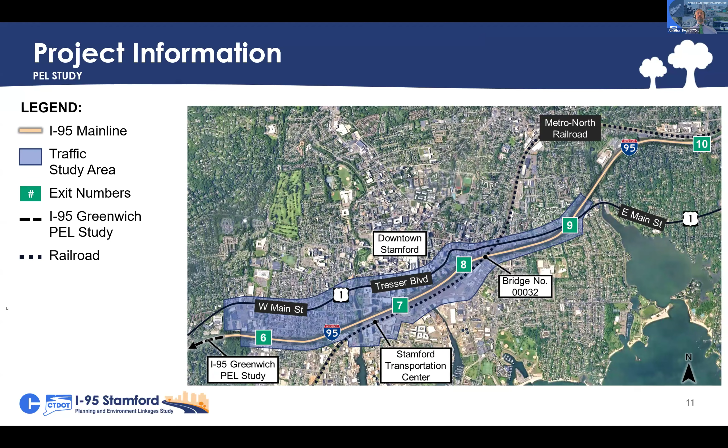And so because there's so much going on in downtown Stamford, busy highway, lots of ramps on and off, as we look at the future of that bridge, we have to understand what is the vision for this whole corridor. So that's why we're undertaking this study. We're also looking at diversion routes like Route 1. So we have West Main Street and Tresser Boulevard, and we've also got adjacent roadways that we'll talk about where the ramps touch down. You can also see the Metro North Railroad on this map, a prominent feature. Next slide, please.

This is an overview of the PEL study process that we've been following. This is, again, our third public meeting so far. Previously in the study, we've established the existing conditions. What are the needs and the deficiencies in terms of how people move through Stamford, traffic operations, safety, multimodal access. From that, we created our draft purpose and need that will guide the alternatives development and selection. And from there, we've developed concept alternatives and started screening.

So today we're going to cover, again, level one screening, which was a low level of detail of what we call that universe of alternatives, followed by level two screening, where we get into a little bit more detail. After we complete level two, we'll move on to a third level of screening, and that will potentially narrow the field down even further.

And the resulting alternatives, there could be multiple alternatives that come out of the PEL and are identified to move forward into the next phase of the project development, which would be the more detailed environmental review under the National Environmental Policy Act. So there will be more public and stakeholder outreach to come, both in this study process and future studies as well.

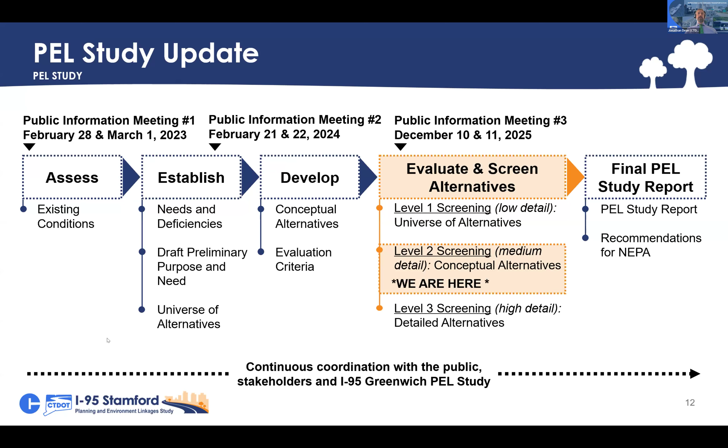Now, how does this study fit into the larger timeline? How do we get to construction? So again, I mentioned that Bridge 32, we've got about 10 or 15 more years of service life. So really the goal is to have that replacement done in the mid-late 2030s. Now, again, this PEL study process that we're following, we're in the very early stages. Really, we have to look at everything. Everything's kind of on the table at this point.

But the advantage of this process is that we combine the early transportation planning with community input, identifying environmental resources. That gives us that range of alternatives that we will take into that next step in the environmental review under NEPA. It'll give us a more complete NEPA process and hopefully an expedited NEPA process as well. When NEPA is done, that's when it will identify one preferred alternative, which would then go into further design. And that's when we start acquiring right of way and getting our permits.

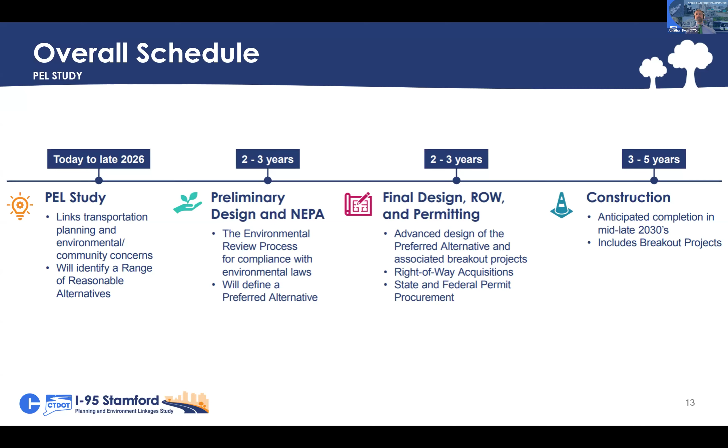I do also want to note that one of the goals of this PEL study and others that we're working on in the state is to identify what we call breakout projects or independent projects that could be done sooner. We've collected a lot of data, done a lot of analyses of transportation conditions, not just on I-95, but again on some of those adjacent roadways. And we want to identify projects that could be done sooner to provide safety and operational benefits. And now I'll hand it over to Ralph.

All right. I hope everybody can hear me. And Stephanie, if you are the host, you have to turn my video back on. There we go. You are back on. Back on. So good morning, everybody.

My name is Ralph Danisco. I'm a senior principal at Stantec and an integrated mobility planner. And I get to lead much of the non-mainline portions of this PEL study. And as Jonathan said, one of the things that the PEL study acknowledges is the adjacent roadways. So we're looking at a larger study area.

It's all of the roads sort of directly adjacent to the main line that are all going to be affected and impacted. They are today by how the main line works, by where those on and off ramps are. And the overall study area recognizes the correlation between the main line and those local roads. And as we do the evaluation criteria for level three, which we'll talk about, we'll see how we do that

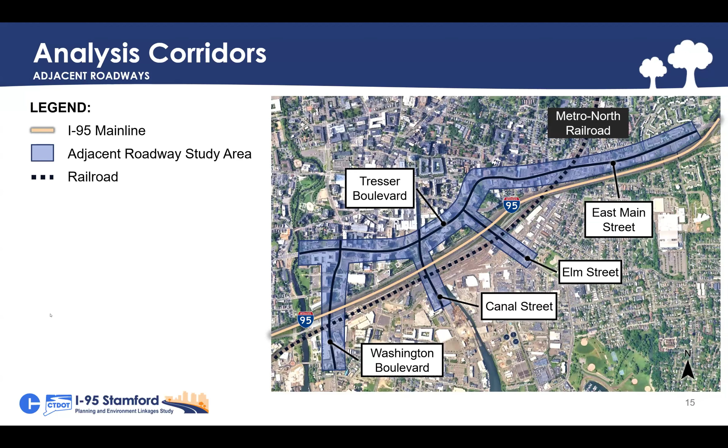much more explicitly. But one of the things that the DOT has asked this process or charged this process with doing is developing several of these adjacent roadways to an advanced concept level of design and align those with the mainline alternatives. And these are the roads that we're taking that extra deep look at right now. So Tresser, East Main, Elm Canal, and Washington Boulevard. We can go to the next slide.

Because for each of those, what we did was we started with the current city plans. City of Stamford is constantly updating and fixing and making changes to each of these roads, signal timing, parking, operations, safety improvements, all of those things. So we built all that in, understood all the private improvements that are happening as well. And then working with the project advisory committee, we developed several approaches for each of these corridors, sort of for what they might look like or how we might want to treat them.

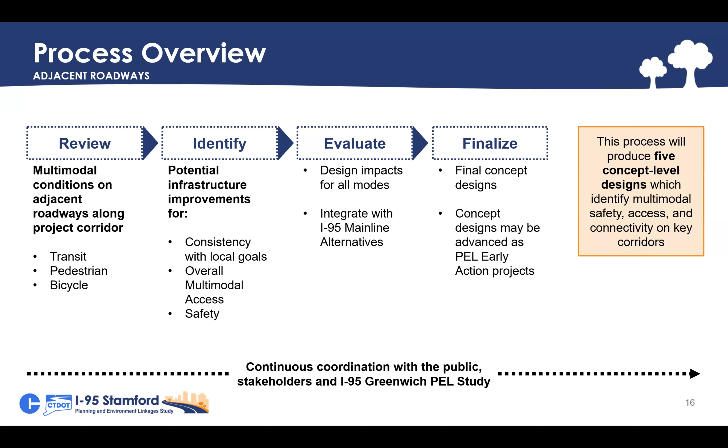And we chose one, and then we've been coordinating those approaches through a concept development process, working with the city, with the sort of full DOT team, so that when we come back at the next PAC meeting and eventually in the public meeting, we can show you some real concept designs for each of those corridors that we can then feed back into the mainline process. And as Jonathan said, I think hopefully some of them could be in a position to be advanced in line with the mainline or even sooner. So that's something we would very much look forward to sharing at a later date. We can go to the next slide.

Additionally, the process has been scoped to include a larger review of what we're calling mobility access. And for there, we're looking at a much larger area than just the adjacent roadways. You can see it on the map on the next slide. And you can see it goes all the way down to the Sound and pretty far north within the city of Stamford. The dashed line shows the kind of mainline area that we talked about a little bit earlier.

And our first step here when we're looking at mobility access is documenting places that are particularly challenged and populations that are particularly challenged. So this could be important locations in Stamford that are hard to get to, or very important schools, hospitals, grocery stores, community centers, parks, things like that. And sort of overlaying that, which is what you're seeing here with places where there are concentrations of populations that are mobility challenged. It could be people without cars, people who are younger, people who are older, people with lower incomes, those sorts of things.

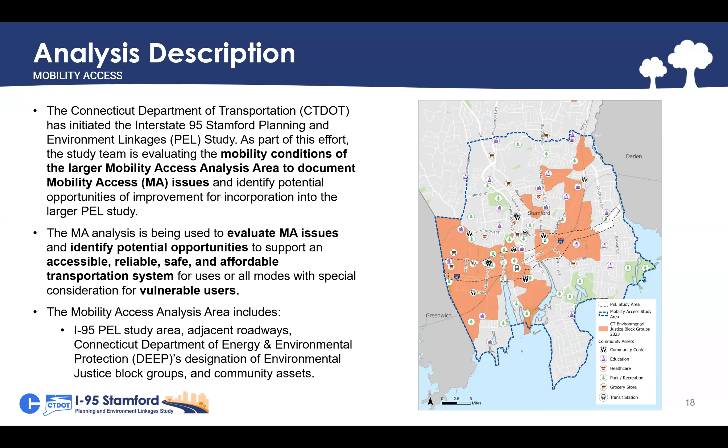And we're doing that and then looking at the larger multimodal network from all perspectives, the pedestrian bicycle networks, transit analysis, safety issues, and then identifying gaps. So where is it where those populations and those destinations and the infrastructure do not match up well, so that we can focus on developing some goals for how we would address those things, and with a particular focus on those challenged areas. We can go to the last slide here.

And where we are in this process is we've developed an overview guide. So we've summarized all that information, all that's going to be available. We're on an ongoing basis holding stakeholder interviews and pop-up events throughout that study area. We've held a survey, we're coordinating that with the city and establishing goals and metrics, which are going to say things like, everybody in Stamford should be within 3 blocks of a high quality bus route, just as an example. It may not be exactly those words. And then identifying where we are meeting those criteria and where we are not.

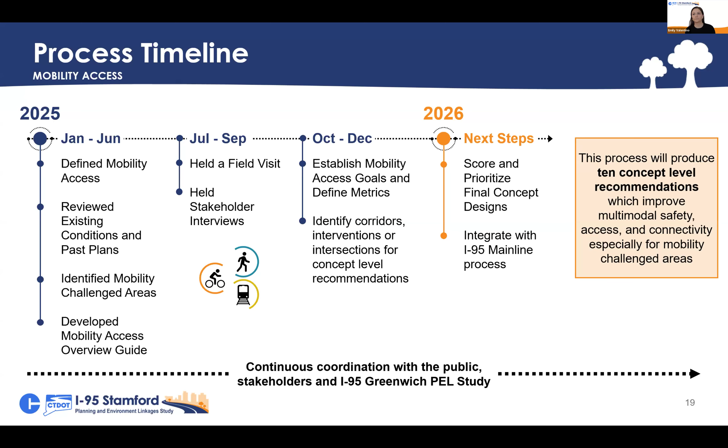And then listing out a whole series of potential improvements that we can prioritize with those goals in mind, and then take 10 of them and develop them to a concept level, that becomes a little bit actionable. We would know this is what we would do, and this is what it would look like, and this is how much it might cost, so that those can be picked up as all of these processes emerge. So that's where we are with both of these processes. Much more detail to come at subsequent meetings, but really today, and at this meeting, we're here to focus on the mainline alternatives.

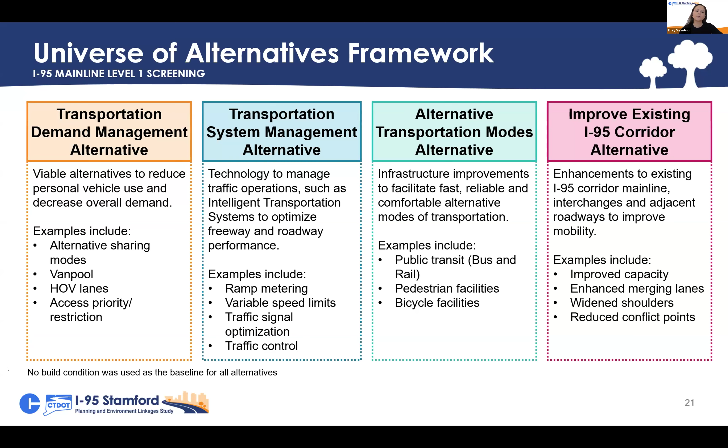So we have 4 types of categories in the universe of alternatives, and this is the level 1 screening. So this is the highest level. How do we evaluate these 4 alternatives? We go back to the purpose and need statement, which really emphasizes the foundation of the project. So what is the purpose of doing the study, and what are the needs of the community and the users of these roadways? So we start with the draft preliminary purpose and need statements, and we have 3 of those.

So mobility and reliability. So we want to increase the mobility for people and goods. We look at geometric and alignment, so bringing any substandard alignments up to standard. And then improve bridge crossings. And I really want to point out Bridge 32 here. It needs to be reconstructed soon, regardless of this study, as John mentioned earlier. So DOT wanted to not just reconstruct the bridge, but also look at the corridor as a whole. So we look at I-95 mainline, and then also what impacts would happen to the Stamford local roadways.

In the second category, we have other desired outcomes, and those can be considered secondary purpose and needs statements, and those are more focused on those adjacent roadways. So we have the mobility on those adjacent roadways, the cross connection of communities, and that's really looking at the north and south connections underneath the highway. Transportation access, so improving the facilities and access to the Stamford Transportation Center. And then construction minimization and avoiding disruption and impacts.

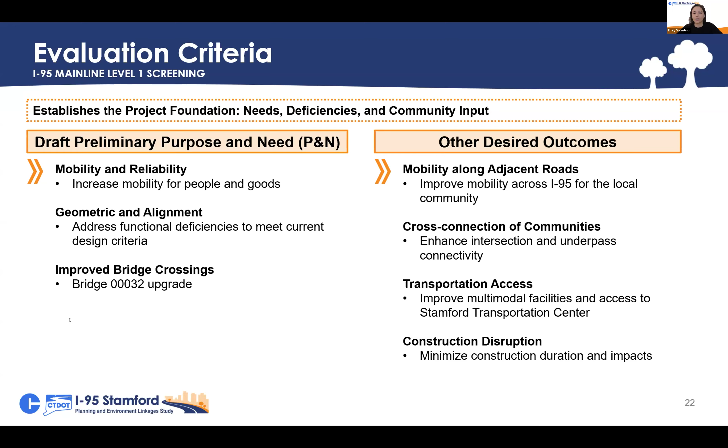So we have the 4 categories of the universe of alternatives. We ranked them against these purpose and needs statements. And we rank them, if we look at the next slide, from most favorable, which is a filled-in circle, to least favorable, which is a hollow circle. And if you see any of the categories with a hollow circle, that means that they do not meet the purpose and need. So on their own, TDM, TSM, and alternative transportation modes do not meet the purpose and need. Improving the existing I-95 corridor is the only category from this level 1 screening that does meet the purpose and need, and we'll move on to the level 2 screening, which I'll describe in a moment.

But I do want to stress that the improve existing corridor alternatives that we come up with will include elements of the TDM, TSM, and alternative transportation modes. However, these on their own do not meet the purpose and need, but they will be incorporated into the future phases of the study.

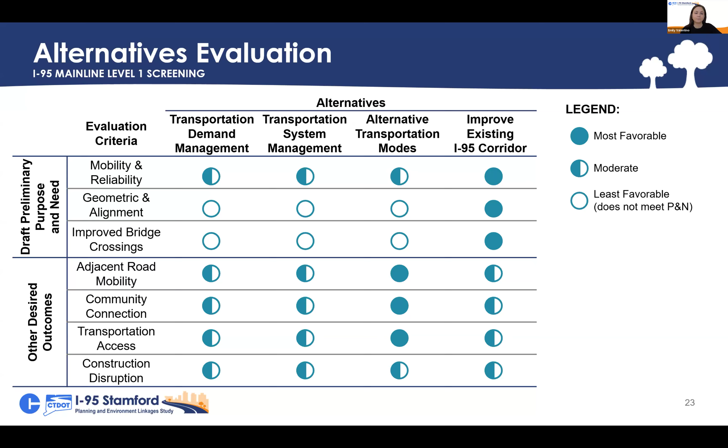We then take it a level deeper and we go to the level 2 screening. And this breaks out again into more subcategories. I want to stress that nothing that you see today is final. We value your feedback and your input. So as we approach the level 3 screening and we move forward along the project, we will be tweaking these alternatives and making them better based on your feedback, based on the traffic analysis and other factors as well.

So these subcategories of the level 2 screening, we broke them out into 3 categories. First one being added capacity alternative, AC. Second, geometric and operational alternatives, those are GO. Collector distributor alternatives is the third category, CD roadways. So we have 3 subcategories, and then there are various elements that we included within these 3 categories, being replace bridge 32, which all of the alternatives do that, modify interchanges, improve some ramps, and realign the main line.

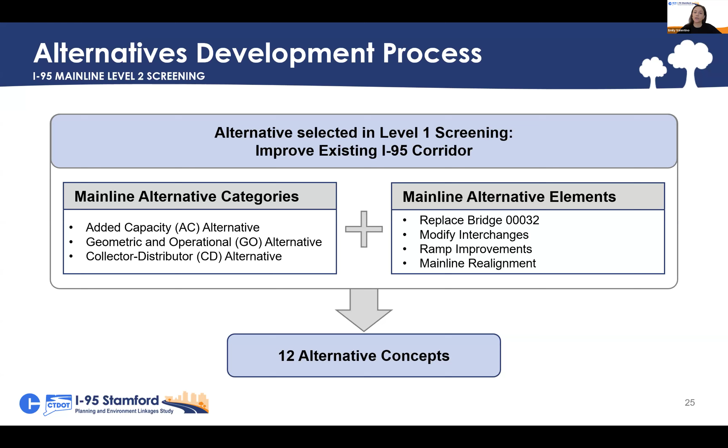So we mixed and matched all of these elements within the categories, and we analyzed 12 concepts within the level 2 screening. I'll start by kind of describing a little bit about those higher level categories, starting with the added capacity alternative. So what that would mean is adding capacity to the main line. So instead of 3 lanes in each direction today, there would be a 4th lane in each direction in the northbound and southbound main line.

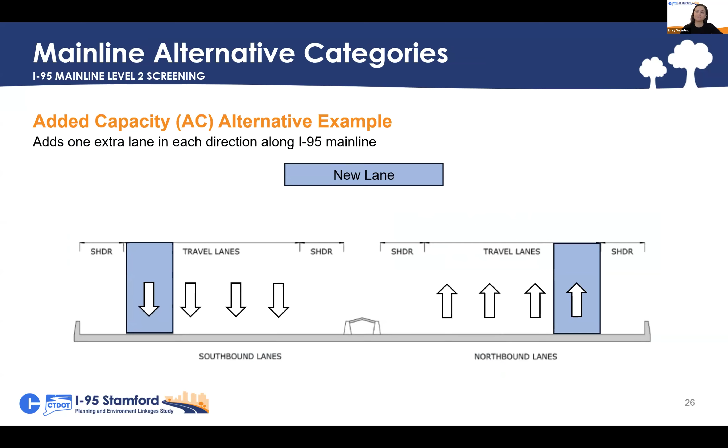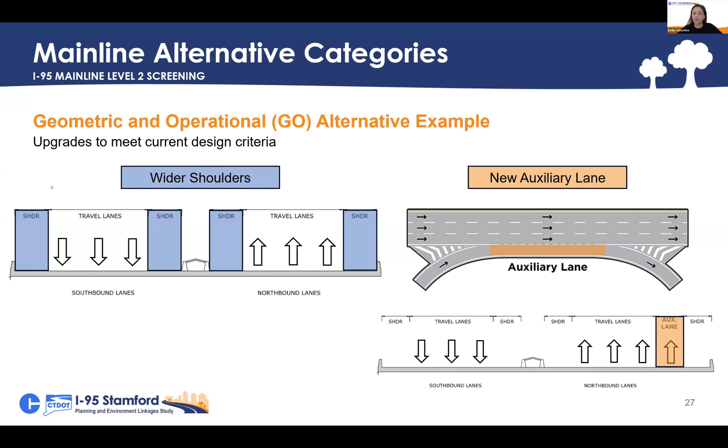The geometric and operational category, an example would be widening shoulders, like I mentioned before. So there's a breakdown lane, so you're not impeding traffic if you need to pull over. Also, adding an auxiliary lane. Think about the project that's currently ongoing and recently completed between 7 and 6. So adding that aux lane so that there's more space to merge onto the highway and also slow down to get off of the highway.

And the last category would be collector distributor alternatives. So this would be a roadway that is parallel to I-95. It would not disrupt the main line. The roadway would collect vehicles, so all the exiting vehicles would exit onto the CD roadway. The speed would be slower. And this is where all the merging and the diverging happens.

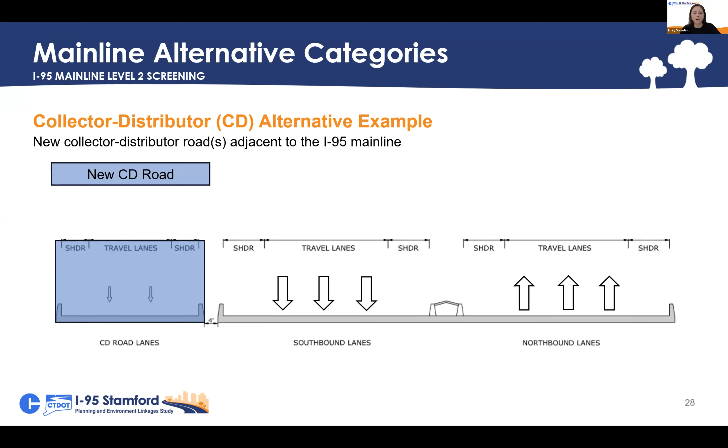So if you're getting off the highway or onto the highway, you first enter or exit the CD roadway, merge with vehicles, and then everybody together comes back onto the main line. So there are less merge and diverge points on the main line, which would lead to safer operations and smoother traffic flow. I'll now hand it over to Chris to talk about some of the more detailed elements within these categories.

Thank you, Emily. My name is Chris Benitez with Stantec. I'm the highway design lead. So as Emily was mentioning, there's 3 main categories of alternatives. And within those 3 main categories, there's a mix of these alternative elements that are listed on the left side of the screen, those 9 elements. We're going to go through each one of those in greater detail in the next few slides.

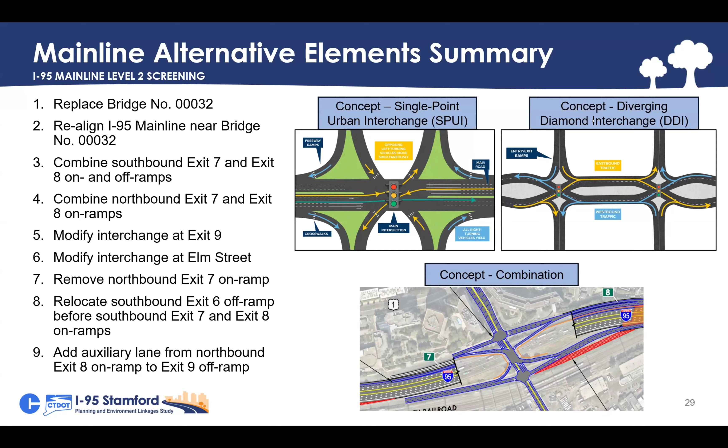But ultimately, the main takeaway here is the 12 alternatives that have been developed are based on a combination of those 3 main categories and all these alternative elements that are mixed together in order for us to identify which are the best performing alternatives. So let's move on to this next slide.

Bridge 32. So this bridge is along I-95, crossing over the Metro North Railroad, Myrtle Avenue, and State Street. This bridge is at the end of its useful service life, and its current configuration does not allow for accommodating today's design standards. So the replacement of Bridge 32 is included in all the alternatives.

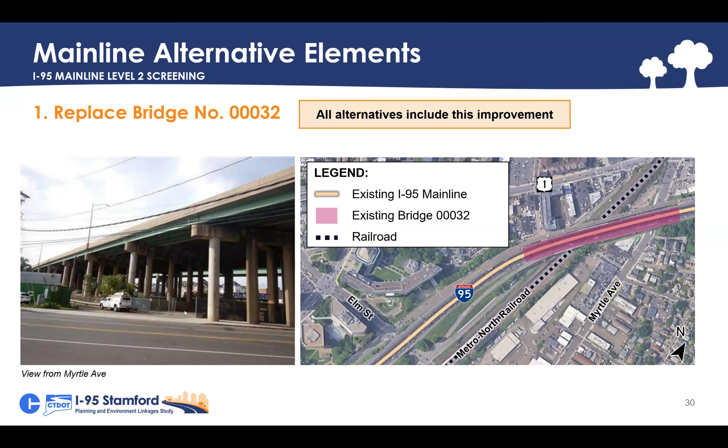All right, let's move on to another alternative element, which is the realignment of the I-95 main line. I'll first start out talking a little bit more about Bridge 32. So this bridge, reconstructing the bridge presents several challenges from a constructability and traffic maintenance perspective. So the idea with realigning the I-95 main line is to construct the bridge adjacent or near the existing bridge so that the traffic could be maintained on the I-95 facility. So this option allows for minimized constructability impacts as well as impacts to the traveling public.

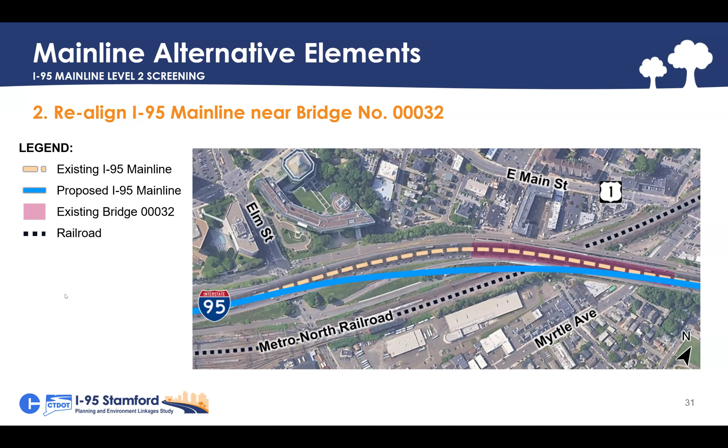All right, now we're going to move over to the southbound side of I-95, exit 7 and 8. Currently at these exits, you have two on-ramps closely spaced together, short acceleration lane. This improvement would combine those ramps so that you would enter the ramps from the same location, but the exit 7 and exit 8 vehicles would merge together into a ramp before merging into the I-95 facility. So this minimizes the conflict points on the expressway, and it also allows for lengthening of that acceleration lane to smooth operations into the expressway.

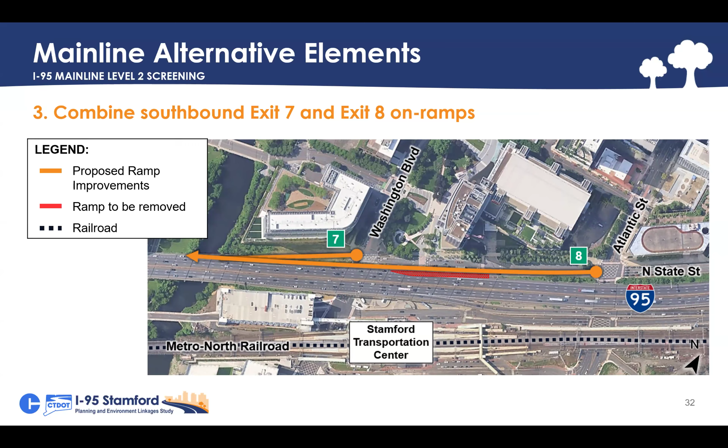All right, now we're going to take it over to the northbound side. Here we have exit 7 and exit 8 on-ramps. Similarly to a lot of these other on-ramps, these are successive on-ramps. So there's a lot of turbulence on the expressway at these points. This improvement would combine the ramps, similar to the southbound side, so that drivers from exit 7 and exit 8 on-ramps would merge into a ramp prior to merging into the expressway. Another improvement that reduces the conflict points on the expressway and reduces the disruptions on the expressway.

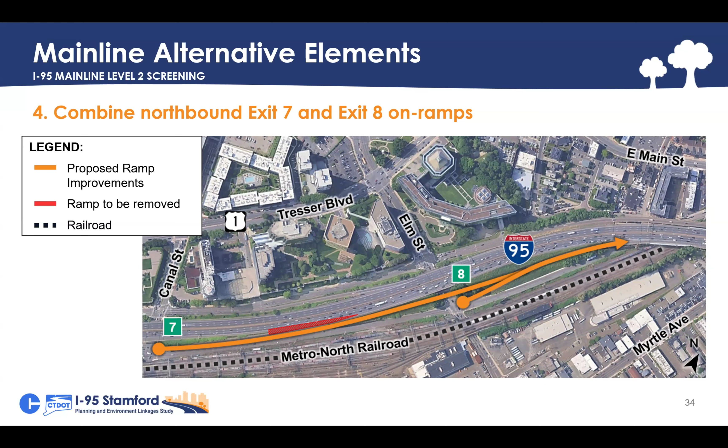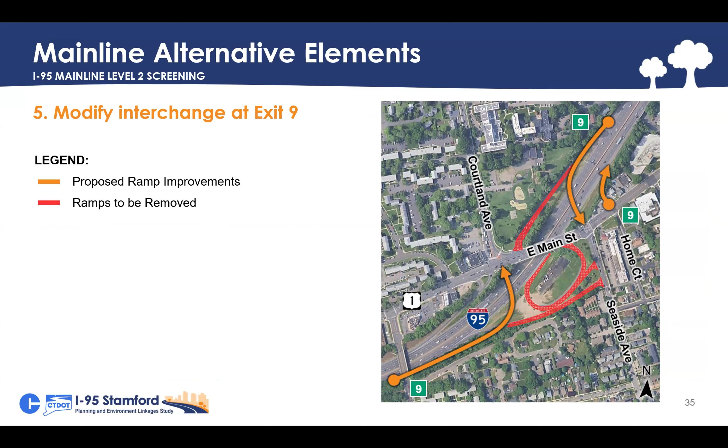So let's move over to, we have the interchange at exit 9. This is East Main. We know that there's a lot of congestion at this interchange. So this is one of the locations we're prioritizing improvements for as part of the study. One of the improvements we're evaluating are new flyover ramps. So these improvement options, we're going to continue refining and evaluating in the more detailed level 3 analysis.

So let's move over to the next interchange. Another interchange, we know there's a lot of congestion. This is at Elm Street. This provides access to the exit 8 ramps. So the current interchange is what we call a tight diamond configuration.

So some of the ideas we're exploring, we've been evaluating. One of them is a modified single point urban interchange. We've also taken a look at a diverging diamond interchange, as well as enhancing the existing diamond interchange configuration. So these are things that we've been evaluating, and we're going to take it to a greater level of detail in the level 3 analysis, and it's going to be harmonized with those adjacent roadway improvements.

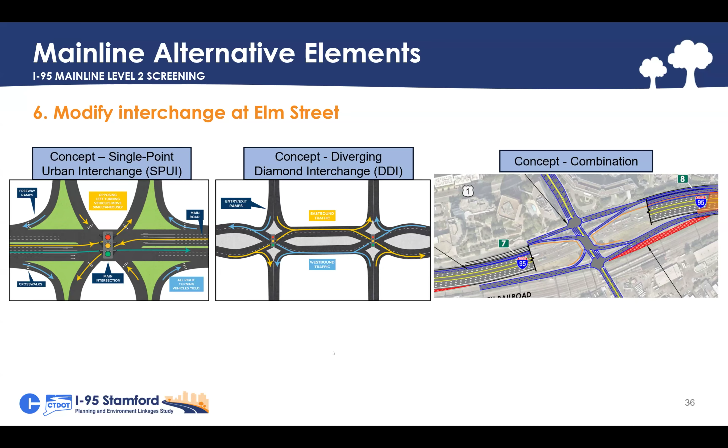Okay, so let's take it over to this next improvement here, removing the northbound exit 7 on-ramp. So this improvement comes into play when we're looking at the Elm Street alternative configurations, such as what I mentioned before, that modified single point urban interchange. It would be required in order to accommodate that type of interchange design. So it would also need to be required for some of the mainline alternatives.

We know that the exit 7 ramp, removing it would reduce the conflict points at this location. But we also understand that it would increase the traffic at exit 8. So that's something we're going to take a closer look in the next stage of the analysis.

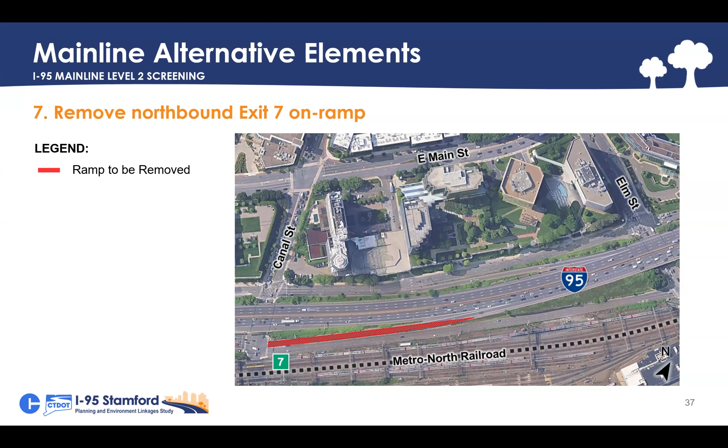So let's move over to the next improvement here. So the relocation of the southbound exit 6 off ramp. Let me just start with exit 7 and exit 8. There's a lot of congestion right there at exit 7 and exit 8 on ramps. You have what I was mentioning before, closely spaced ramps, a lot of traffic entering from both of those exits, and in addition to the I-95 mainline traffic.

So this improvement would relocate the exit 6 off ramp before exit 7 and exit 8. And the benefit of that is that would reduce the traffic that is on that stretch of expressway at exit 7 and 8 and improve the operations. So how would this be accomplished? The exit 6 off ramp, conceptualized, it would be accessed right around Elm Street, and then it would be elevated over exit 7 and exit 8 on ramps so that exit 7 and exit 8 are maintained. And then the exit 6 off ramp, that elevated section would tie back down to the I-95 main line and exit off.

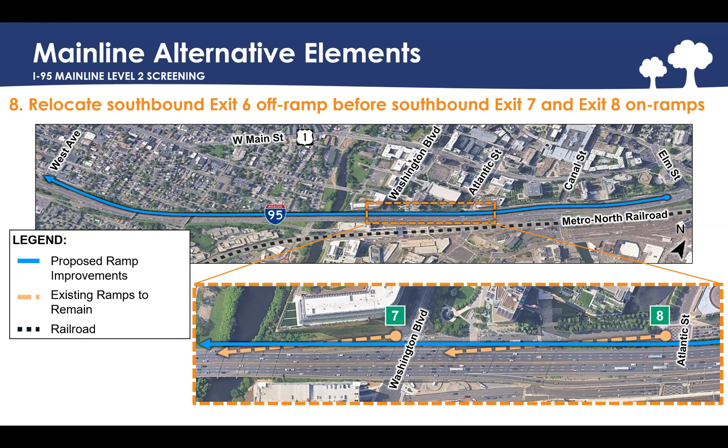So let's move over to the auxiliary lane. Emily was just talking about this one. This improvement would add an auxiliary lane between exit 8 on-ramp and exit 9 off-ramp. So similar to the exit 6 to exit 7 auxiliary lane improvements that are there today. I believe they're finalized, they're completed.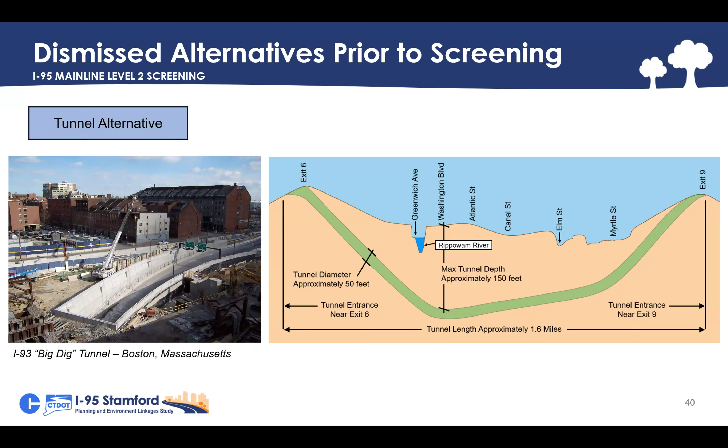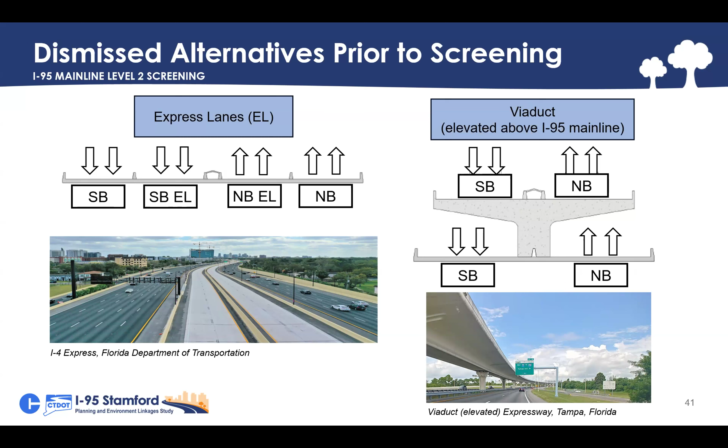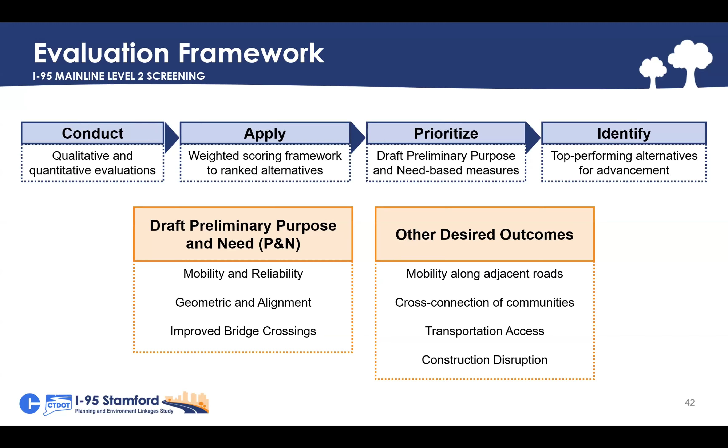Okay, let's talk a little bit on the next slide here with the framework. So we established a framework prior to evaluating all the alternatives, and we're going to get to some of the criteria in the next slide. But just so you know, the evaluation framework we took was establishing qualitative and quantitative evaluation measures. We came up with a scoring system, prioritized some of those purpose and need measures that Emily was mentioning, and we're gonna walk through them right now in the next slide, and then we identified those top performing alternatives. I think the key takeaway here is that this process was developed so that there is a fair and consistent approach to evaluating all of the alternatives.

So let's move over to the evaluation criteria. So this is building on that level one screening. Level one screening, purpose and need, other desired outcomes. So we have transportation-based measures, we have constructability, environment, and community. So these are the measures in this level two analysis that were used to evaluate all of the alternatives. In level three, there's going to be a more detailed evaluation criteria.

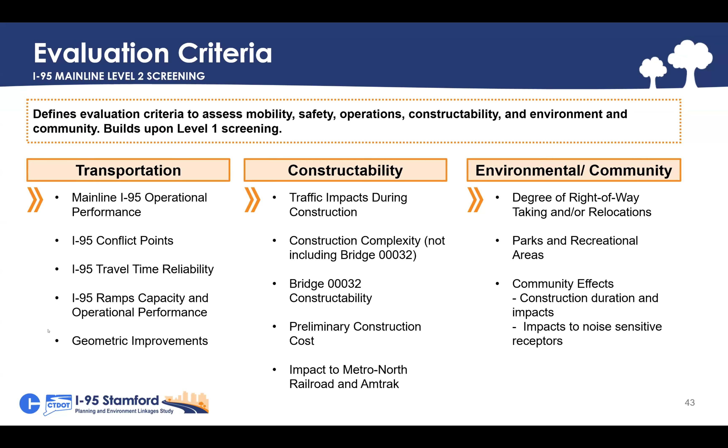So we have identified 4 alternatives, which we're going to walk you through in a little bit, just to go over some of the improvements. But ultimately, each of those main categories of alternatives, there's at least one alternative that is advancing to the next stage. So we're still going to be looking at, in level 3, an added capacity, a geometric and operational, and a collector and distributor option. So having said that, we're going to now walk through some of these alternatives.

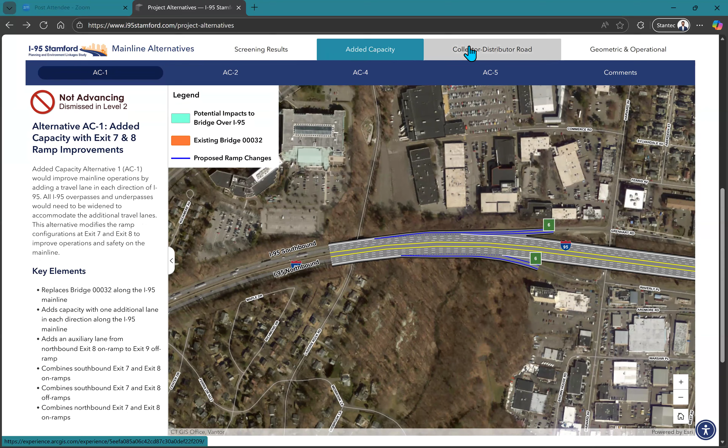Okay, so we have provided a link to the website. This is up and running. You all are free to access this and check out the alternatives at your own leisure. So I'll walk through some of these alternatives, but ultimately, if you go to the project website, Project Alternatives tab up here, and then if you scroll down, you have all of these alternatives for the main line. So just real quick, to get your bearings straight, when you scroll down, top row, you'll see screening results, added capacity, collector distributor, geometric and operational. When you click on each of these, all the alternatives that we were just talking about, they show up.

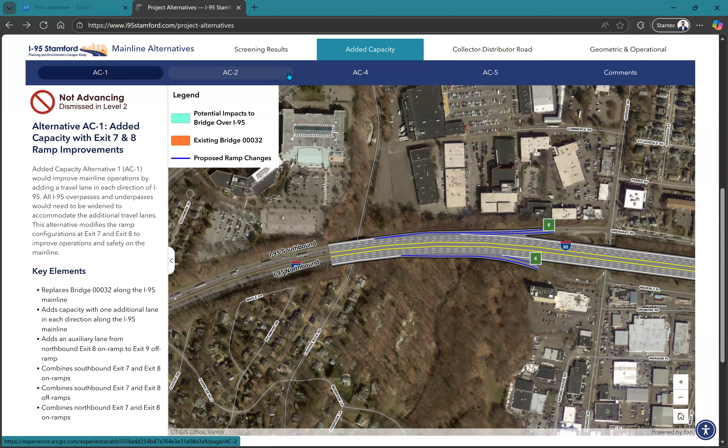So what you will notice is the alternatives that are not advancing, you'll see it, let's say, AC1, not advancing, and then the alternatives that are advancing will not have that. So those are the ones that you want to check out if you want to check out the advancing alternatives. So let's talk a little about AC4. So this alternative is the one that would be adding an additional lane in each direction of the main line.

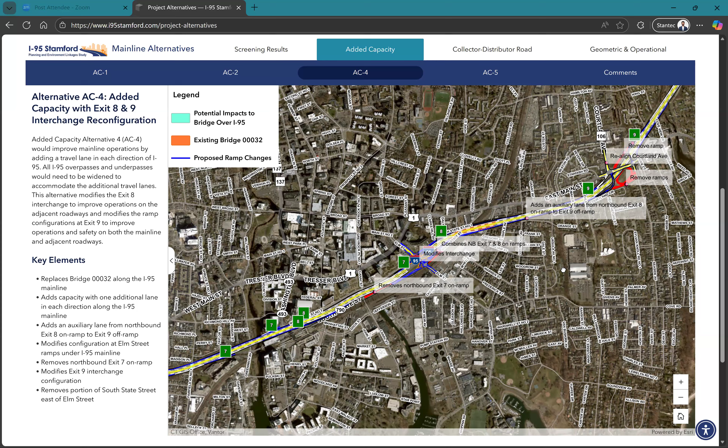So it would include 4 lanes in each direction. Now let me highlight some of the main improvements from this one. I'm going to zoom in, and you can zoom in if you're a little unfamiliar with this. If you just click on the map, you can drag the map anywhere, and you can zoom using the zoom features here. You can also, I believe, scroll as well. Yes, I'm scrolling, so okay.

So I'm going to zoom in a little bit more so y'all can see. So AC4. This is one of the improvements that we're looking at for AC4, modifying this interchange. What you're seeing here is that modified single point urban interchange. Keep in mind, Emily mentioned it, these are not final. We're still going to be making lots of refinements, and we're going to be evaluating these in greater detail in the next stage. So this is the modified interchange.

This improvement would also include, actually, let me zoom back in. Maybe stay here at this zoom level. This is the removal of exit 7 on-ramp. And the reason why is primarily because of that modified single point urban interchange, which cannot be accommodated at this point.

Okay, let's travel up a little bit more. This also includes removal of State Street. And that is because right now, based off of this modified interchange design, the ramp may not reach the vertical clearance requirements to allow for State Street to operate. So something we're going to take a closer look at in the next stage.

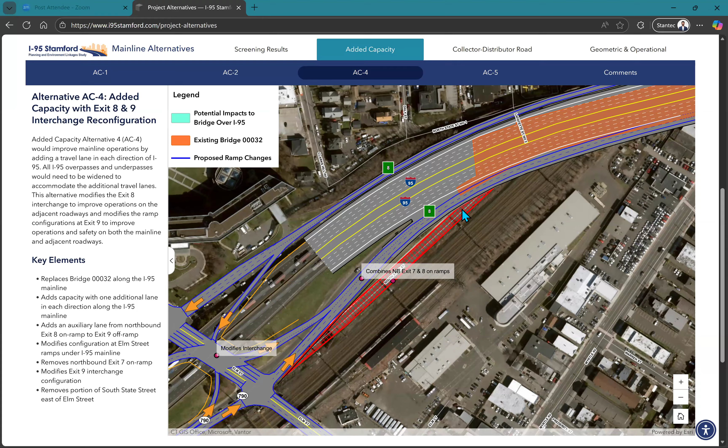But let's move over to the final improvement here. Before we get to the interchange at East Main Street at exit 9, this improvement also includes that auxiliary lane between northbound exit 8 on-ramp and exit 9 off-ramp. And notice that there's labels for these improvements, so it makes it easier to find where these improvements are. And one thing I almost forgot to mention is we do have a description of all the alternatives on the left side of the screen, including the key elements.

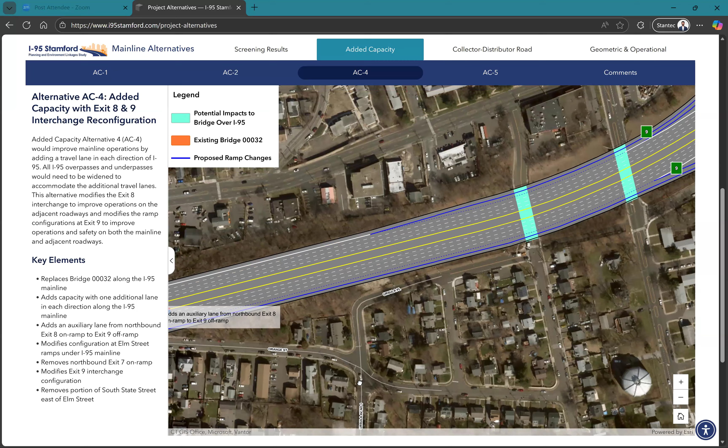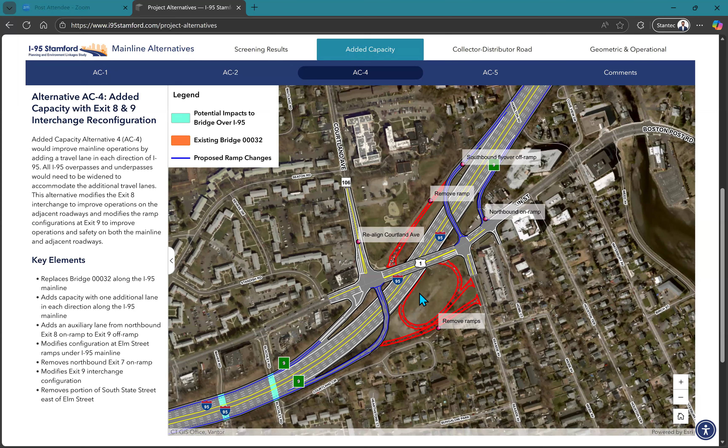All right, let's get over to exit 9. I'm going to zoom out a little bit. I think this is too close. Okay, so exit 9, East Main. So this is the one we're looking at, flyover ramps. We're looking at a few other options. So this is a priority interchange to evaluate.

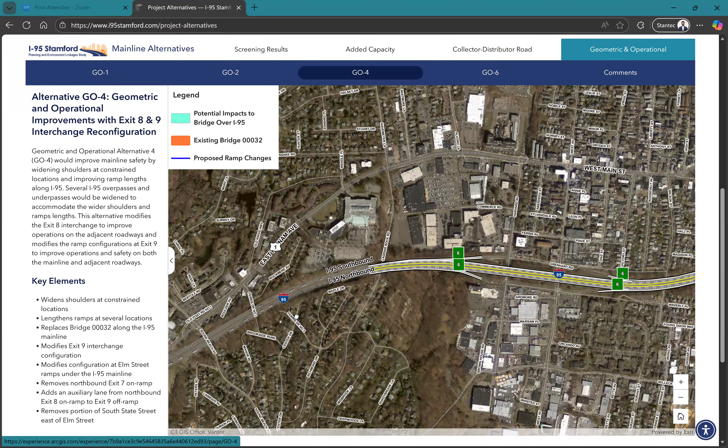All right, let's go geometric and operational. GO-4, that's another one of those advanced alternatives. So I'm going to take it high level, and then I'm going to zoom into some of the other improvements. So we're starting with the interchange at Elm Street. Same thing as AC4. We're looking into modifying this interchange as part of this improvement. This would also include removing that northbound exit 7 on-ramp. All right, and then I'm going to scroll here. Removing the South State Street due to the vertical clearance.

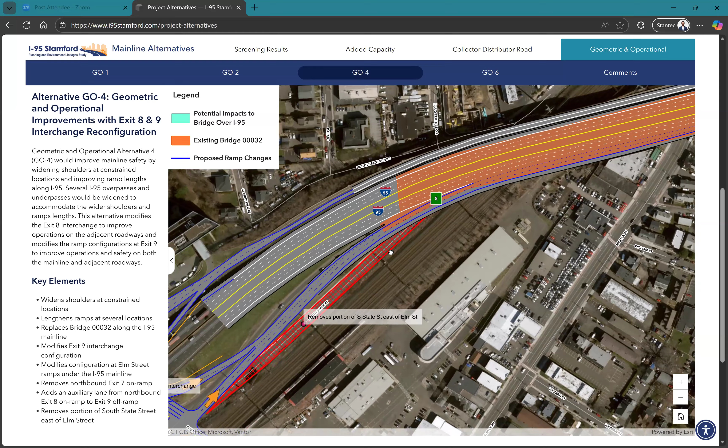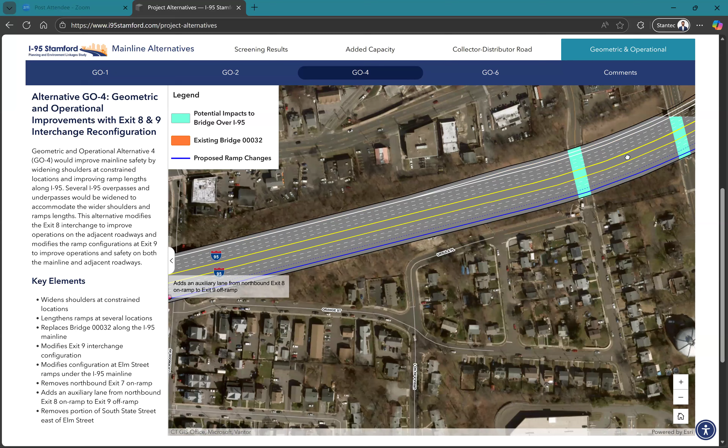And then this would also include that auxiliary lane, which I'm going to scroll here. Here's the little sign for the auxiliary lane between northbound exit 8 on-ramp and exit 9 off-ramp. And then the final improvement here is the exit 9 interchange, which includes East Main. So very similar to AC4 in terms of the interchanges and some of the improvements. Main difference is AC adds that additional lane in each direction.

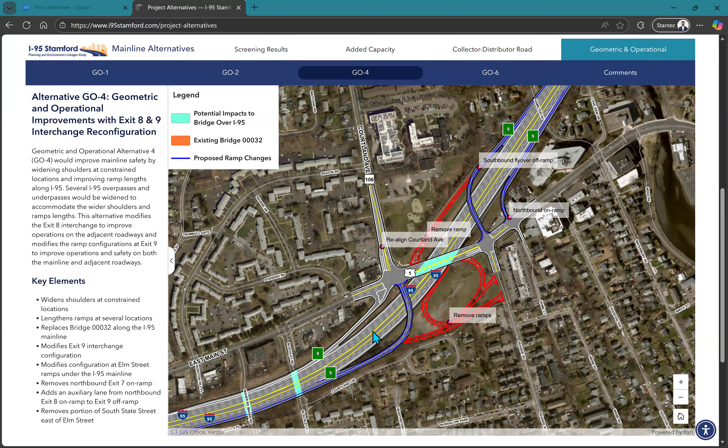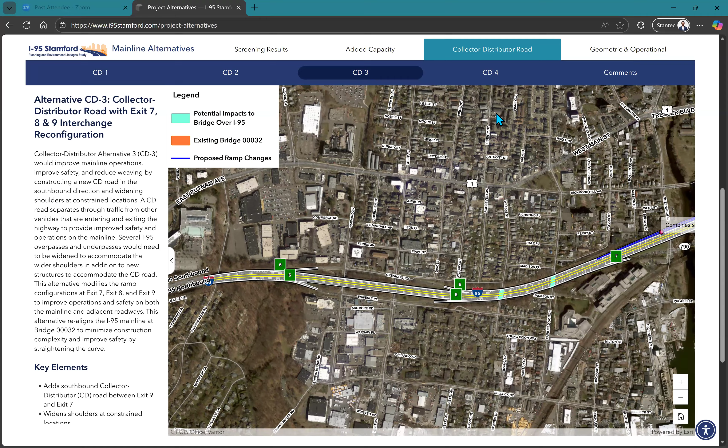All right, let's hop over to the collector distributor roads. I'll start with CD3. So collector distributor roads, 2 of them are moving forward. They're 2 very distinct alternatives. Keep that in mind. So CD3, the big difference between the 2 CD road alternatives: CD3 includes only a southbound CD road, collector distributor road, and CD4 includes both a southbound and a northbound CD road. So let's get into some of these improvements now of CD3. I'll show you the CD roads in just a little bit. Let me just go through the west side here.

So this alternative includes a combination of the southbound exit 7 and 8 on-ramps, which is what I was describing, how these exit 8 and exit 7, they combine. The drivers would combine into this ramp before entering the expressway. Okay, let's scroll over here. Try not to go too fast. We don't want to get dizzy. Okay. All right.

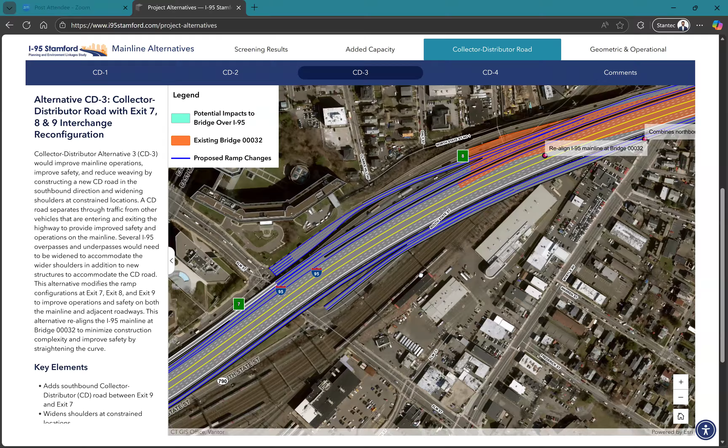So this alternative also includes a combination of the exit 7 and exit 8 on-ramps. Similar to the southbound side, this would have drivers merge into this ramp before merging onto I-95, and then that would continue as an auxiliary lane all the way over to exit 9. Another key feature here, I know I'm going back and forth, I'm going to try not to, I'm going to slow down here. But another key feature here that we're looking at, realignment of the I-95 facility. This improvement is to minimize those constructability challenges that I was mentioning earlier.

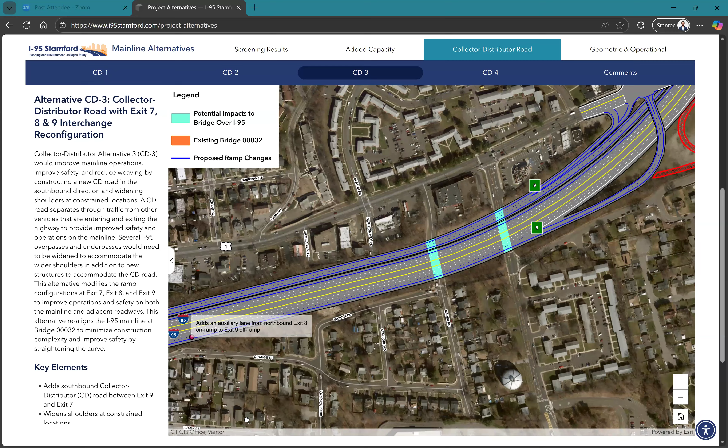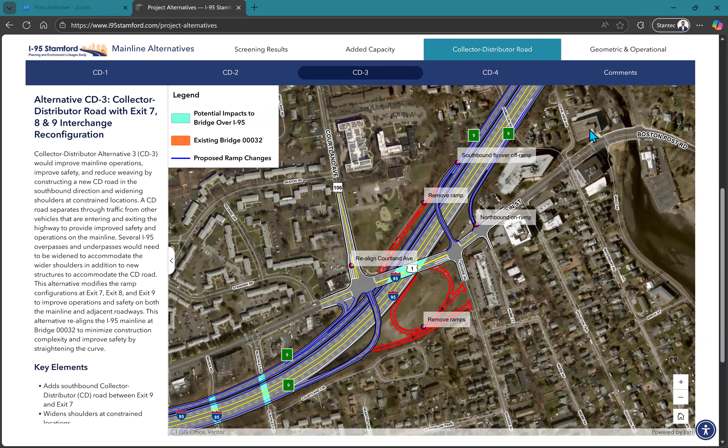So, okay, before we get to the CD road, let's head over to exit 9, interchange, same thing. You're going to see this concept. It's the same concept in all of the alternatives. This is something we're going to refine, but ultimately we're looking at flyover ramps and refinements to those ramps and evaluating in greater detail in the next level.

Okay, so what is a CD road? Let's take it over to the starting point of the CD road. This is the southbound CD road. So this CD road would start right at the southbound, right around the service plaza area.

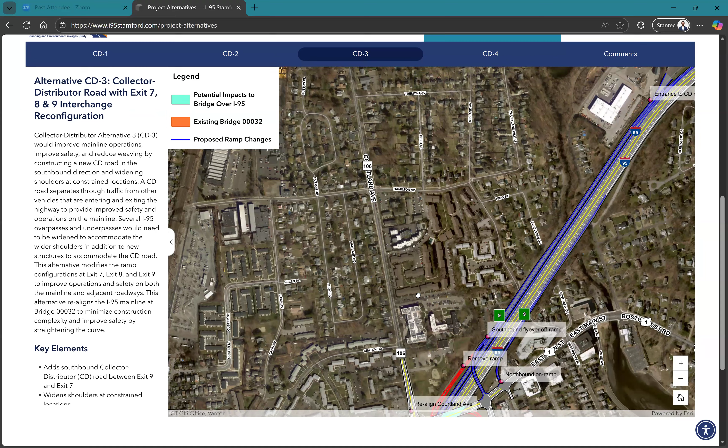And so the CD road would essentially start near the service plaza area, and it would allow for the on and off ramp movements to be collected, the local traffic along this CD road. Improves operations on I-95. This would continue on up until exit 8.

So you see this blue line here, that is the CD road. And the CD road would continue on, allowing folks to get off on exit 7, get off on exit 8, or continue on and get on the I-95 main line at around this location between Elm Street and Canal Street.

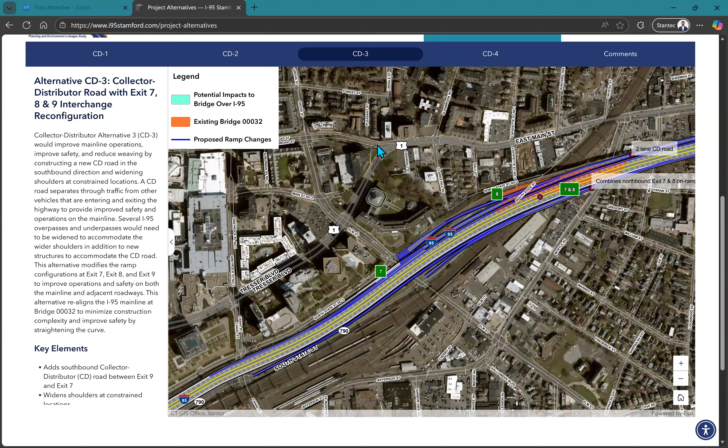Okay, now let's go over to CD4. This is the last one, so bear with me. We're almost there. So CD4, this alternative includes both the northbound and the southbound CD road. So some of the improvements that we're looking at as part of this, I'm going to zoom in to this improvement here, removing northbound exit 7 on-ramp, and that is to accommodate the northbound CD road.

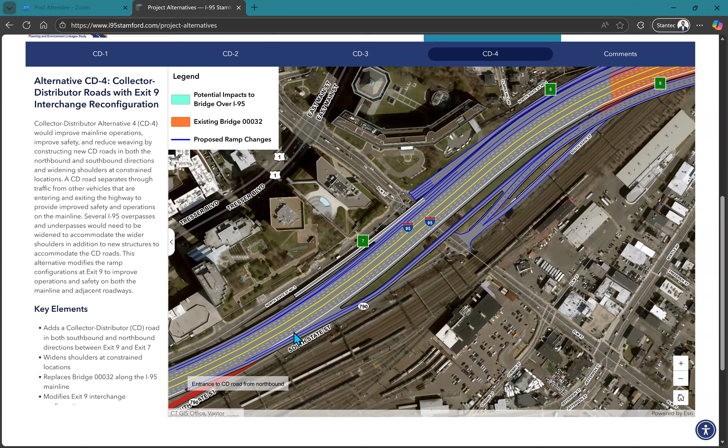So we're going to take a trip through this northbound CD road, which would start right around the exit 7, 8 area by Elm Street. CD road would start and then collect traffic from the ramps. I'm going to zoom out a little bit, and you'll see this blue line on the bottom, that is the CD road alternative. I'm going to zoom in a little bit more at this interchange 9.

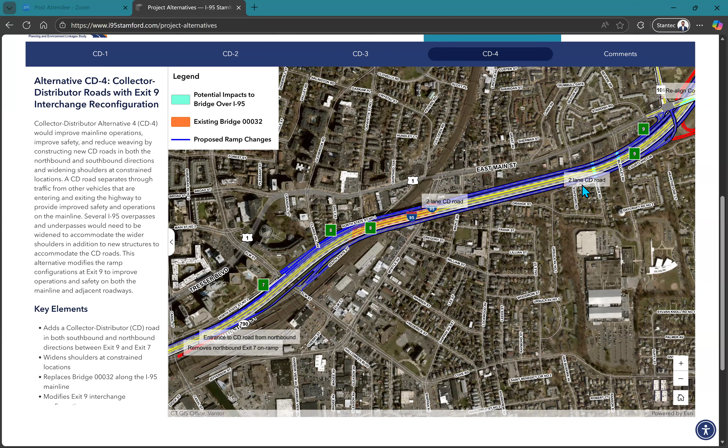So keep in mind, it will be separated from the I-95 main line, collecting and distributing the traffic from the on-ramps and the off-ramps. So it would continue beyond exit 9, and then that would be the access point to the I-95 main line.

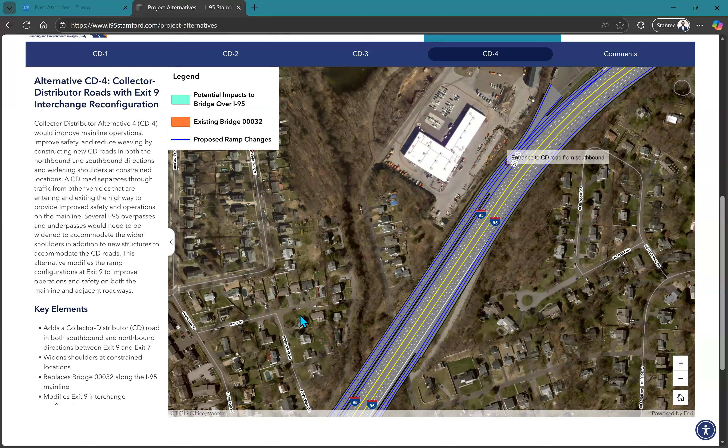Now, the southbound CD road is a similar design to CD3. So I'll just highlight again, this one would be located going southbound from the service plaza, all the way over to exit 7 at that same connection point that I showed with CD3.

Let me wrap up with the final improvement here. Same as all the other improvements, as I mentioned earlier, we know there's a lot of congestion here. It's a critical location to improve. So this is this interchange exit 9 East Main. That's something we're taking a close look at.

So right now what you're seeing are the flyover ramps that are conceptualized. So none of these are final. There's going to be refinements that are going to continue in level 3, as well as a more detailed evaluation. So with that, I'm going to share this back with Emily.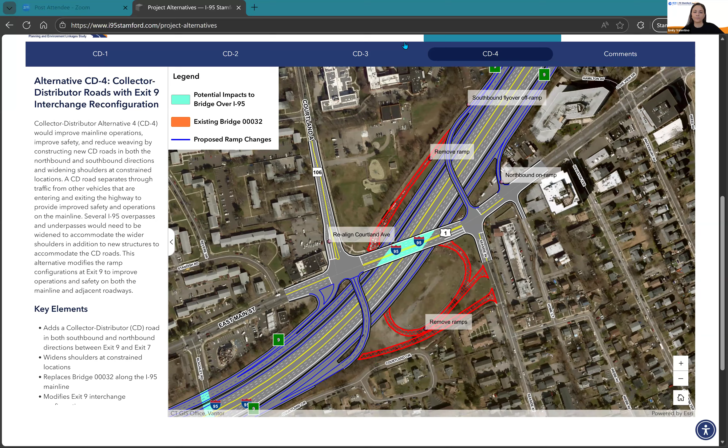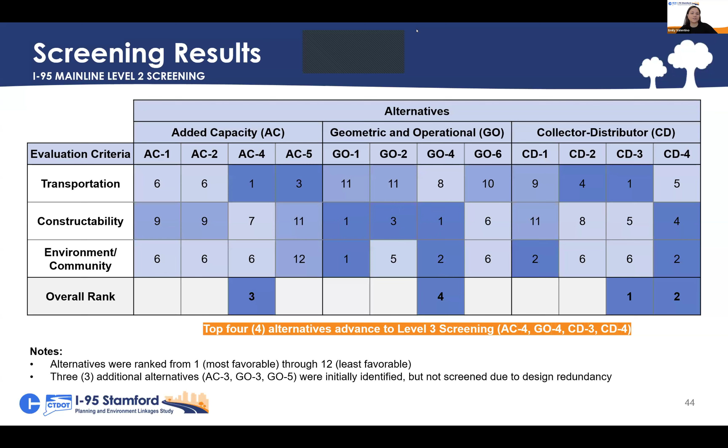Thank you, Chris. Alrighty, Stephanie, if you could share back the presentation. I will talk about next steps of the study before we get into your questions. So the mobility team, next step is finalizing the adjacent roadway concepts. Those will be shared with you all in early 2026. Simultaneously, we will move into the more detailed level 3 screening of those 4 alternatives Chris just walked you through. And that will take into account the comments that we received from you all today.

And we wrap up in mid-2026 with the main line, adjacent roadway, mobility access, and scenario planning analyses all coming together for the final PEL study recommendations, which will be toward the end of 2026, which we then move into the NEPA phase. So those are our next steps.